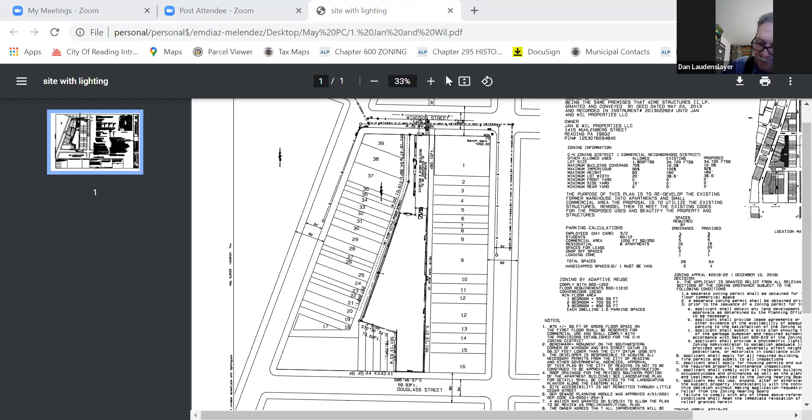Okay, if the commission is so inclined to grant approval of the plan, since there's no record of it, we'll just use the term approval rather than reaffirmation. You could include in the single motion authorizing the chairman to sign the appropriate agreements.

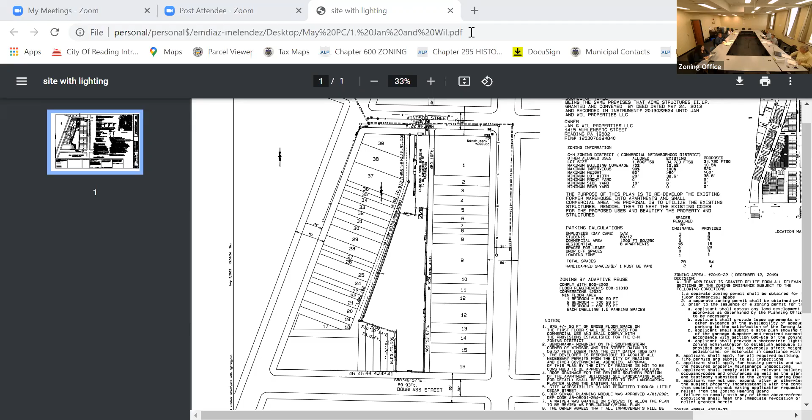Do I hear a motion to give conditional approval to the preliminary final land development plan for Jan and Wil Properties at 810 Windsor Street, with the conditions that the simple improvements agreement will be completed, and that everything on the Hawk Valley Associates review letter dated May 16th, 2022 is met before signature. There's no stormwater agreement required for this project. The improvements agreement can be signed by the chairman when received.

Lee Olsen will make that motion. Thank you, Lee. Do we hear a second? Bob Conklin. Thank you, Bob.

Question on the motion? All those in favor, please say aye. Aye. Aye. Opposed? Very good.

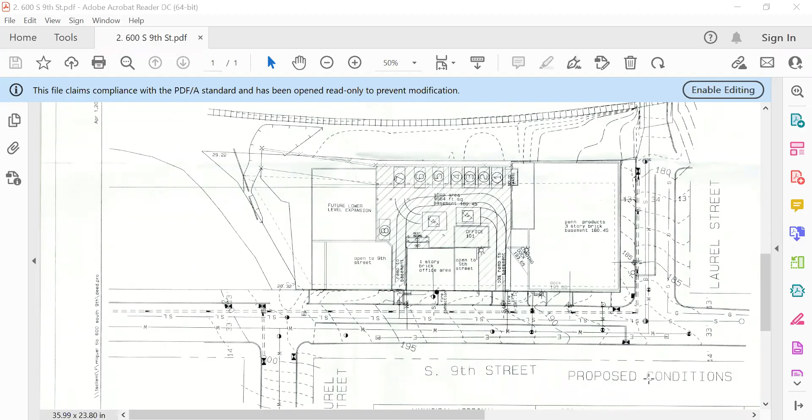I think the idea was that they didn't know exactly what the uses were going to be, so they would prefer to have those cuts remain as is. And we were agreeable with that, with the idea that some of them could use some upgrading. Some of them do appear deteriorated and could use some patching.

We've also asked the fire and rescue department to make sure that the fire hydrants are in appropriate locations considering the use. The improvements on this site would either be none or very minor. I can't think of any, Tim, unless you can, that would require an improvements agreement. I was just gonna ask Tim—no, I don't think that would be of the scale that the planning commission would typically require an improvements agreement.

That was regarding these curb cuts. Yes, any repairs. Okay, yes, there's no stormwater, nothing else from Public Works would require improvements. Everything else in our review letter can be cleared up with notes on the plan. I believe we can do that.

The folks are trying to restore this building, and they have come up with a use for a portion of it, but they have no plans for the other. Now, the auto repairs could maybe expand into some of these other areas, but then we'd have to come back to planning again. And we can put a note to that manner on there.

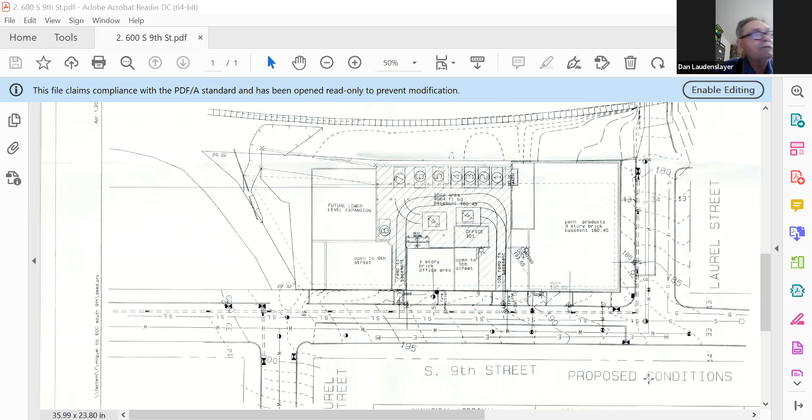And we don't need a sewer module on this one? No. Okay. Right, 2 employees. Okay.

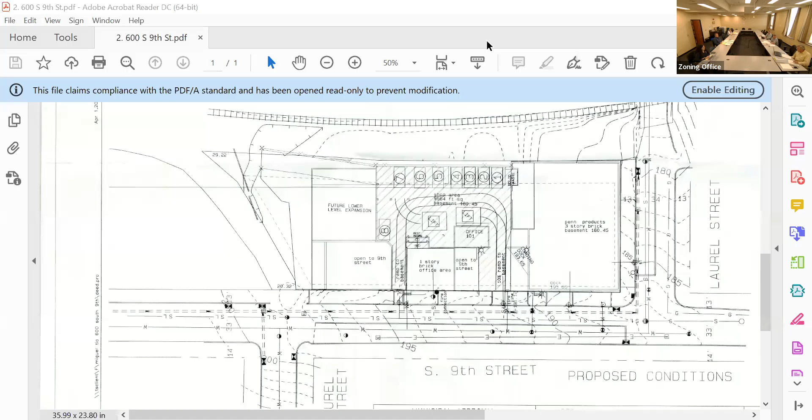Very good. Are there any other comments from staff? Any comments from the commissioners? Hearing none, I'll ask for a...

Motion to give conditional approval to the Auto Repair Center at 600 South 9th Street, with the provision that the items from the Hawk Valley Associates review of May 17th, 2022 are completed to the satisfaction of staff.

Okay, Peter makes the motion. Do I hear a second? Lee Olsen will second. Okay, thank you, Lee.

Discussion on the motion? Okay, hearing none. All those in favor, please say aye. Aye. Aye. Opposed? Okay, and there we go.

Thanks again, Dan. Really appreciate all your hard work. Thank you, I've got two more later on. Okay, we'll touch base.

All right, next on our agenda is the O'Neill Storage Facility, the final land development plan.

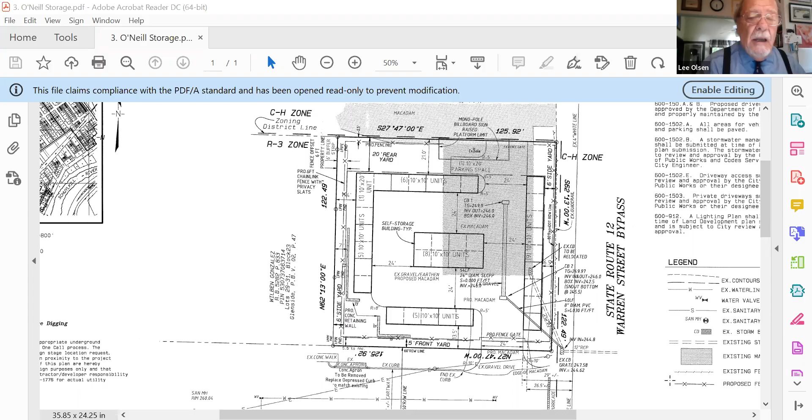With that, first we need to make a motion to accept a waiver for the groundwater recharge calculations as defined in section 505-125 of the stormwater ordinance. Do I hear a motion? So move. Okay, thank you, Nelson. And a second. Lee Olsen will second. Okay, thank you, Lee. Question on the motion? All those in favor, please say aye. Aye. Aye. Opposed? Okay.

Are we ready for conditional approval on this one? I have no doubt that John Hoppert's office is capable of making the revisions. There are no outside permit reviews, so everything else should fall into place. Karen, do you have any objections or other comments?

No, I don't believe so. I had sent an email to you and that was our main concern, and I think we addressed all of those, so I'm good with that. Therefore, we're acceptable to conditional approval.

Emily had stepped out when the issue arose about the fire review. Yeah, I was going to bring that up. There was a question as to whether any comments have been received from the Department of Fire and Rescue, it's comment 6 in my review. You haven't received any? I'm sure I can follow up with fire. Very good. With that, do I hear a motion to grant conditional approval to the O'Neill Storage Land Development Plan

for 1403 Chester Street, with the provisions that the comments of the Hawk Valley Associates review letter of May 19th, 2022 are met to the satisfaction of staff, and that the chairman can endorse the municipal improvements agreement and the stormwater management plan when received. Lee Olsen will make that motion.

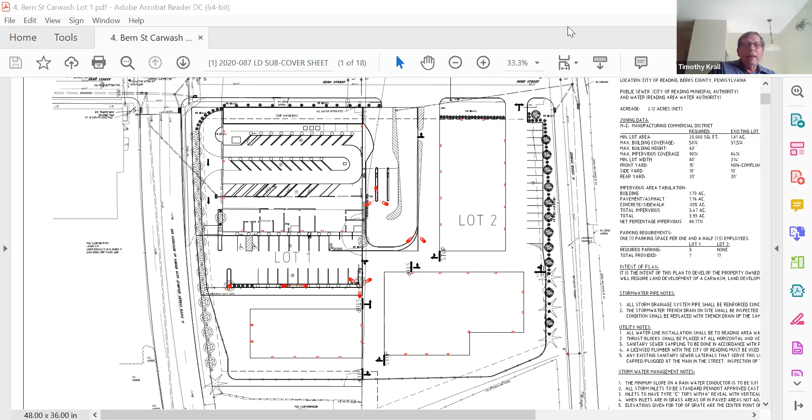Good point. If you wanted to continue that, we would need an ordinance because I'm going to guess there isn't one already. And vice versa, if there is one and we need to repeal it, if you want it repealed, correct. Michelle, could you, when you get a chance, let me know the review of that, if that's in your domain? So I understand where it's located. Yes, thank you.

Greg, did you have a chance to submit for the HOP permit? Not yet. It wasn't that long ago that we really walked everything, and that plan was being worked out as we speak. Okay, but you agree that there probably needs to be one pulled? Yeah, I walked it as well with Mr. Lovell and the team for the project with the applicant, and everybody was agreeable.

Yeah, the HOP and NPDES permit will take time. Very good. Any comments from the commissioners? Hearing none.

Mr. Chairman, can you hear me? Oh hi, Will, there you are. Yeah, go ahead, Will. I was muted, okay.

Thank you, I just have one quick question. It's not as much of a concern as it had been on the plan we just approved, because the access seems to be a lot easier for this site, but has there been any discussion yet on the billboard and any easement for the access of that? I know this is only for the preliminary, but I was just wondering about that.

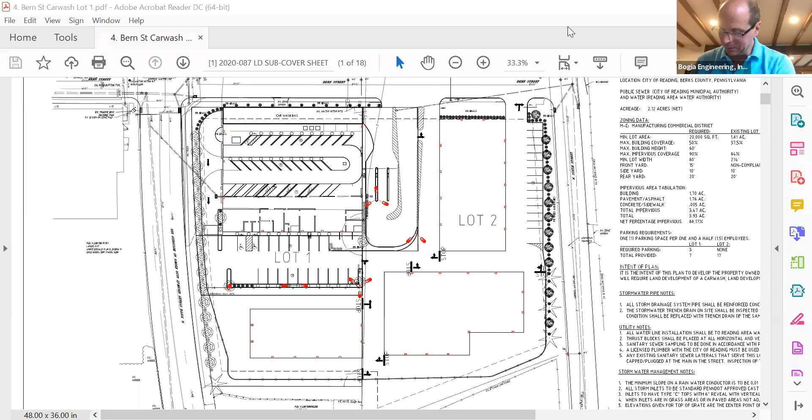Very good, any other comments? Okay, hearing none. Do I hear a motion for conditional approval of the revised preliminary plan for lot 1 of the Bern Street Car Wash at 1725 North Fifth Street, with the condition that the comments of the Hawk Valley Associates review letter of May 20th, 2022 are resolved to the satisfaction of staff. Bob Conklin makes that motion. Okay, thank you, Bob. Second? Lee Olsen seconds. Okay, Peter was first, so we'll take Peter's for this time.

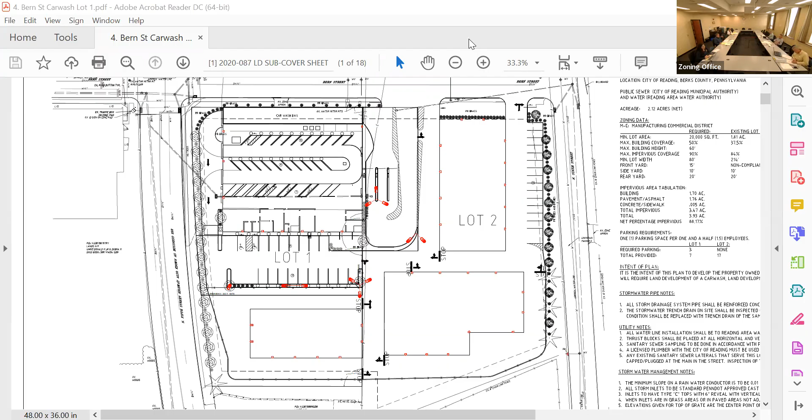Okay, any question on the motion? Hearing none, all those in favor, please say aye. Aye. Aye. Opposed? Very good.

And since we kind of talked about these things in congruence, you had to talk about them both. Yeah, since we talked about these together, may I hear a motion to approve the conditional approval of the revised preliminary plan of lot 2 at 1704 North Sixth Street, with the condition that the items on the review letter by Hawk Valley Associates of May 20th, 2022 are resolved to the satisfaction of staff. I'll offer that motion, Mr. Chairman. Okay, thank you, Will. And a second? Peter? Peter seconds.

Any question on the motion? Hearing none, all those in favor, please say aye. Aye. Aye. Opposed?

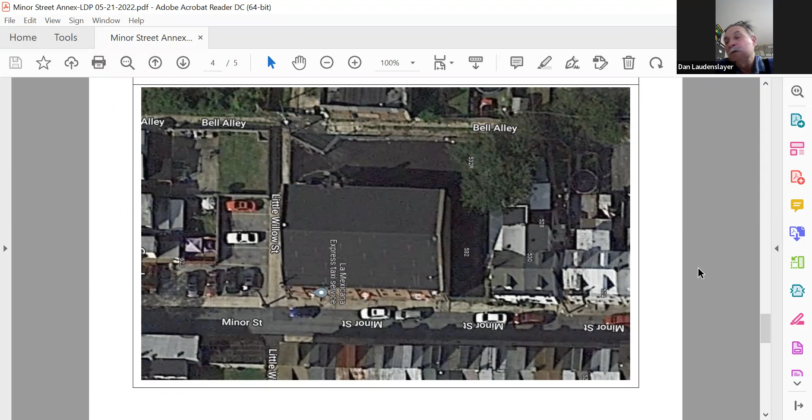Curbs and sidewalks in the front along Minor Street are in fair condition. We had asked Public Works to evaluate those to make sure they did not need to be replaced at this time.

Tim, do you have anything on those? Yeah, I would suggest, Dan, that you do the same thing Greg did and have Chris Lovell go out and look at it, he's best equipped for that. Just from the photos, from what I looked at, I would agree, they look like they're in fair condition.

My question would be, I see the whole front of the building is posted as a loading zone. Is that the owner's intent, or is that a leftover from Dolan, or do you need a loading zone across the front of the building? I'm not sure, Tim, the loading zone was never used in that location. I think that goes back to the horse and buggy days. That location was never used.

I don't even think it has access. If we removed that loading zone, we could free up at least a couple of spaces for the neighborhood. You've got a garage on the north end, and the driveway next to it, but from there on you might have 2 or 3 spaces where the loading zone is.

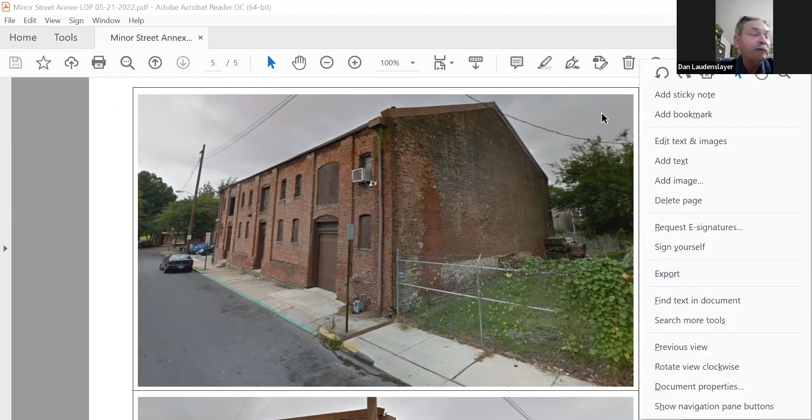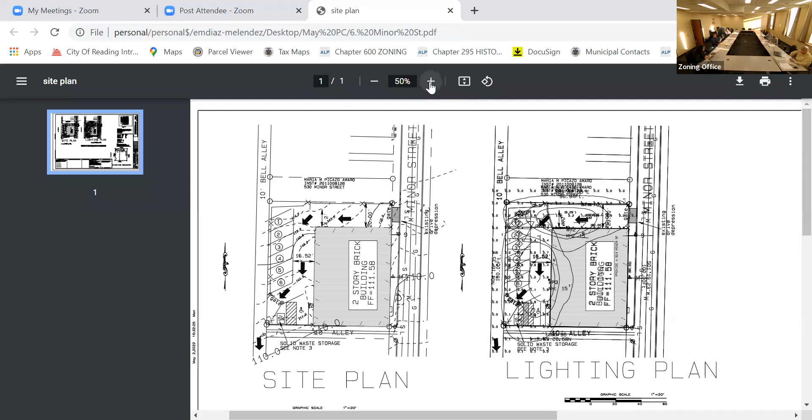Dan, one thing I left off the review was, can a vehicle get in and out of space one? I'll have to check it. Space one, is that down by the gate? Yeah, space one is on the corner - it would be the first space you'd get to if you enter off of Minor Street. Oh, well, you should be able to drive in there and be able to back out of it. Okay, check with your client.

Dan, was that area paved in the past, or was it lawn? In the back of the building, where it was paved, where zoning was commenting about gravel. You know, it's like Jerome is saying that Dolan Construction had that, and they were driving in and out of there - I'm sure Dolan built that driveway. Right, so they were - but it wasn't particularly paved. Well, even if it was gravel, we consider that paved. Is that what you remember, Jerome? Yeah, that was gravel.

So that was probably before 2008, would you say? I don't know, how far back are you going? We'll go back to 1985. Okay, yeah, I know Dolan's been around. Looking at the wearing on that concrete, on that driveway ramp, I agree with it - that looks like driveway ramps I built back in the 70s and early 80s. Yeah, if that has been used as paving, whether asphalt or brick or whatever, if it was used as paving and you went in there and paved it, we've always considered that maintenance and not new impervious. It's always been impervious because you've used it for commercial use here, in this case with trucks and whatnot.

So if you could put some landscaping in there, that'd be wonderful. Well, that's what I did. But look at my landscape - otherwise it would not apply to the stormwater management ordinance here. Okay, but we'll take the green space. I struggled trying to get some kind of stormwater credits on there, and to try to convey that roof water back out to the street, so it's not impacting the rear of their building. Very good.

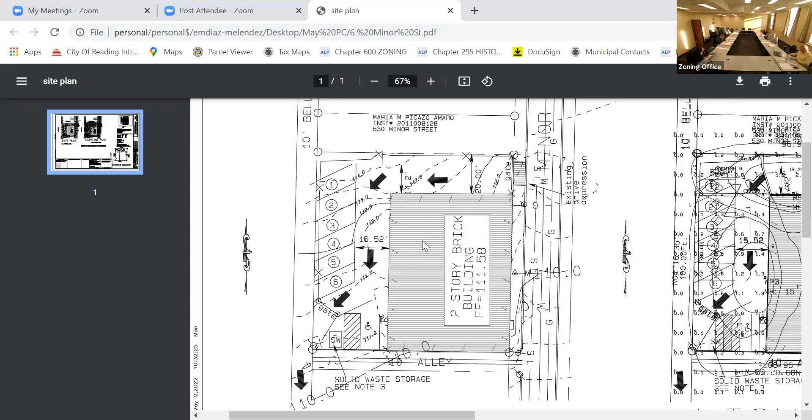Next on our list, we have the Sixth and Spring Parking Facility preliminary final land development plan at 601 North 6th Street.

Those of us who have been here a while may remember that we approved the subdivision of this back in 2017, and the subdivision plan was recorded on June 5th, 2017. I pulled those things up so that Jerome had a little bit of background about this. So I'll turn it over to Jerome.

This plan was reviewed on May 22nd, 2022. This is a preliminary/final land development plan. It is a 23,085 square foot property that is currently a vacant lot. The applicant intends to develop the site with a surface parking area in order to accommodate the existing commercial and residential uses located on the...

Let's call it the, which corner? That is the catty corner, south. Yeah, that would be the southwest corner. Yes, of 6th and Spring.

Plan consists of 2 plan sheets. The site is located within the manufacturing commercial zoning district. The proposed surface parking area and use was permitted as a principal use. As I had mentioned, it is to specifically address a need for parking within the area, not for a new use, but for an existing use. There are 28 off-street parking spaces located within this facility.

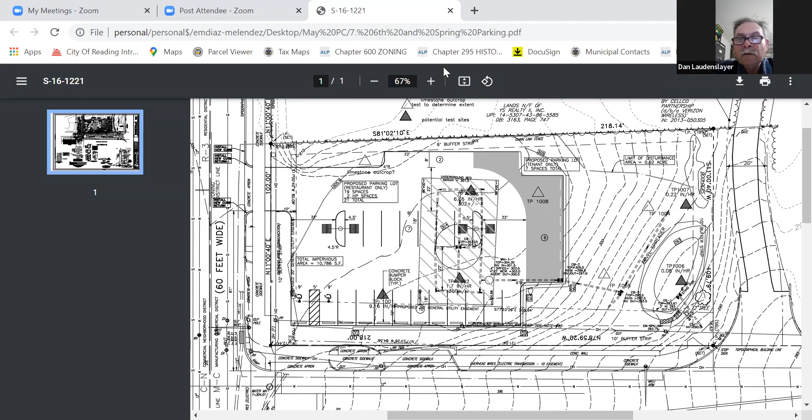Yeah, it occurred to me over the weekend, Dan, that the Spring Street improvement project was coming up because they're finishing the River Road extension that's coming along, and I knew that the Spring Street upgrade would come right after that. So I figured if you knew a little bit more about it, that would put the owner of this property a little more at ease, that some of these things will be actually taken care of for him.

Any other comments from staff? Any comments from the commissioners?

Yeah, this is Will, Mr. Chairman. I couldn't remember how many years ago it was, but we reviewed this last. I'm glad you mentioned it was 2017. And just to clarify, at that time, what we did do was we approved the subdivision from the Norfolk Southern parcel. We did that because the purpose was what the applicant, the owner wanted was to develop this as a parking lot, even though, as far back as I remember, which is even further back, it's always been used as a parking lot. I think it might have been a car dealership at one point, but it's always been occupied. He wanted to improve it as a parking lot to serve the former guardhouse restaurant, which has served as other kinds of restaurants since then, and I think has been vacant since. And like you said, the stormwater was really challenging because of the difficult topography of this site. So it's good that there's a plan now that can address that satisfactorily.

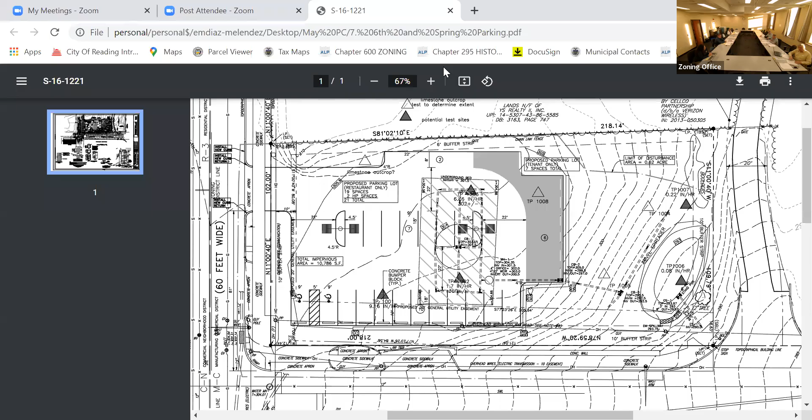Right. Any other comments? Okay. With that, do I hear a motion to table this until we receive the Berks County Planning Commission comments? I'll move to table it until we receive the Berks County Planning Commission comments. Thank you. Will, second? Second. Thank you, Nelson. You're welcome. Question on the motion? All those in favor of the motion, please say aye. Aye. Aye. Aye. Opposed? Very good.

We move this one ahead now, finally, after all these years.

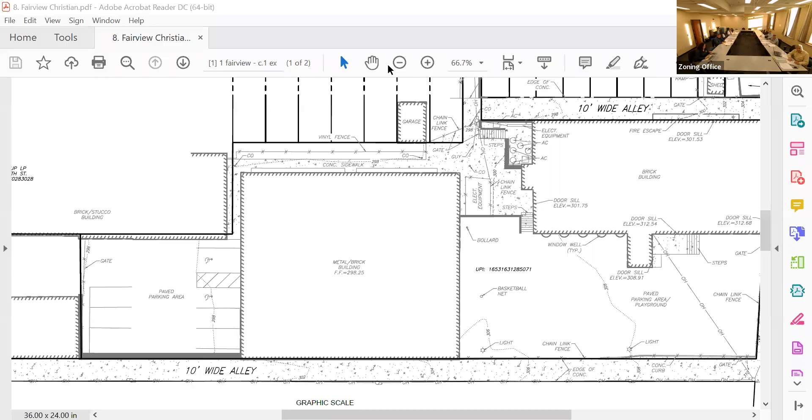Next on our list is the Fairview Annexation and Land Development Plan. This review is dated May 22nd, 2022. This was an older plan that had different variations, and I want to clarify what the current proposal is: it's an annexation involving 4 parcels, not 5.

It's 4 parcels. One parcel is occupied by a residential use and will remain as a residential use. The remaining parcels, the other 4, would be joined in common deed. That's what we've described in our review as phase 1. The lower section of this property has access onto

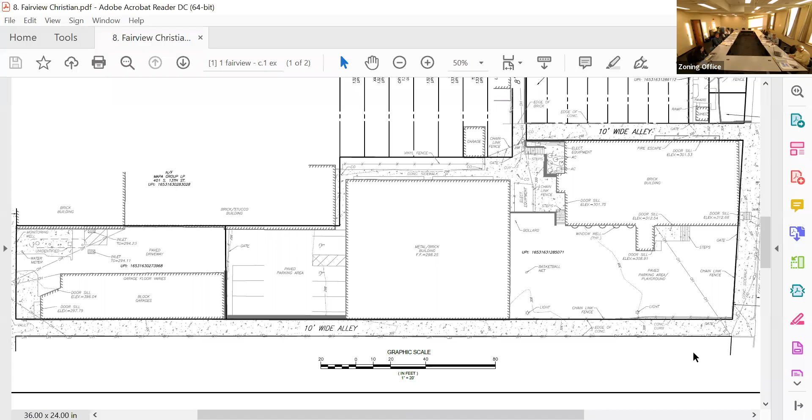South 13th Street, and is being modified slightly as a result of the demolition work done to some outbuildings on the site. So the reconfiguration of the parking will be done. This area is all impervious now, so it's being restriped, and that's shown on the plan with site access. The upper section, which has access onto South 14th Street, was previously attempted to be utilized for parking, as well as modifications to the curb line and driveway line.

That will not be pursued at this time — that would be classified as phase 2. The applicant would still be permitted to park the buses in that location as they did in the past. We've discussed that also with the fire marshal, and he said that's acceptable as long as the drivers remain in the vehicle, not abandon it on site. So as long as that happens, they'll be fine.

So the project is quite simplified from what we reviewed, because we thought other portions were going to be included, such as retaining walls and things like that. They're not going to be included as part of this phase. As you can see on the plan view now, you can see the number of parking spaces, which would help this existing school with parking. Now it's providing more spaces, and the ability to get in and out of those parking areas is enhanced to the point where it's not a maze to get in and out.

Having said all that, the applicant, I believe, is on the line. Hello? Anyone there? Yes, I'm here. Can you hear me? Yeah. Is all that information correct?

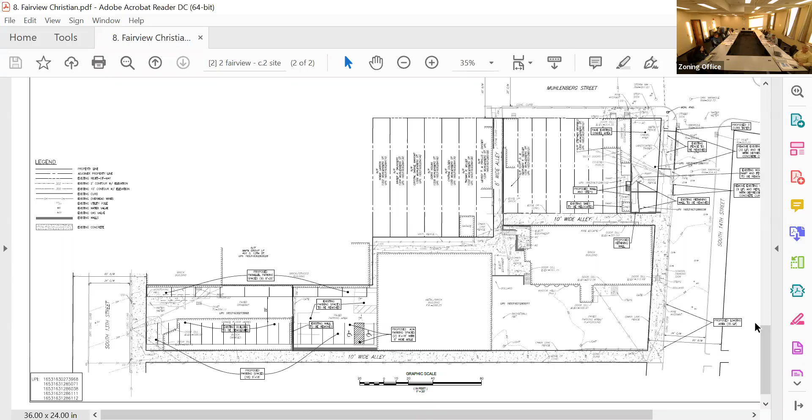Is there any other comments from staff? No agreements, I presume. No agreements.

Do you have anything, Tim? Yeah, the only comment I had is, did we adequately address the parking situation there at the northeast corner up at Muhlenberg Street? They're not pursuing that at all. I'm sorry, I missed that. Okay, they're abandoning that phase of the project. Oh, okay, because it looks like there is potential there for parking. So, okay, and I have no other comments.

Any comments from the commissioners? So which of the 4 are they in the annexation? Ryan, are you still there? Yeah, so which one? It's the lot against 13th Street, backing up to what is our gymnasium, an existing parking lot in the back. So that is 2 lots,

and then combining the corner there on the northeast of 14th and Muhlenberg. There's 2 lots there, which is an empty lot now, combining those 2. It originally had included the first residence there, 1352 Muhlenberg, but that was incorrect — that's not a part of the operation of the school. So it's a total of 4 lots being combined to the school, known as 410 South 14th Street.

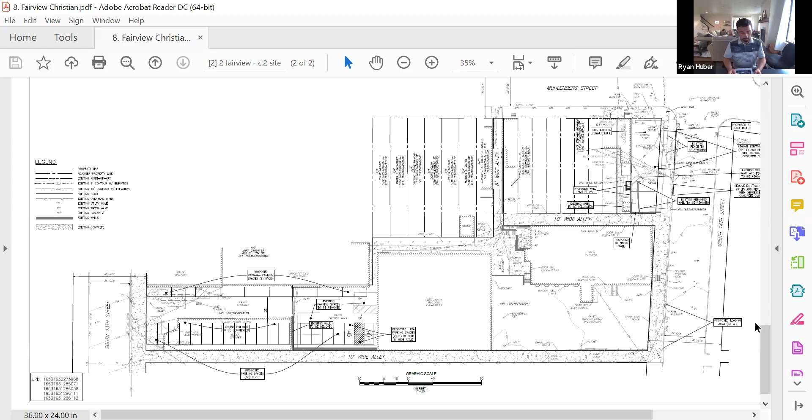1352 Muhlenberg Street, is that the one that contains... maybe I'm wrong. I think 52 is the house, that's the one being removed. 54 is the lot on the corner, which would be B on your review. Yeah, so A is the one being removed.

Okay, now it makes sense to me. Now I'm looking at it correctly. I had it confused. Google put the address, the 1354, behind 1352, next to it.

All right, any other comments from the commissioners? And so with that, hearing none...

Do I hear a motion to conditionally approve the preliminary final plan application for phase 1 of the Fairview Annexation and Land Development Plan, that will combine 1354 Muhlenberg Street, 406 South 14th Street, 410 South 14th Street, and 421 South 13th Street, provided that all comments on the Hawk Valley Associates...

review dated May 22nd, 2022 are resolved to the satisfaction of staff. Lee Olsen will make that motion.

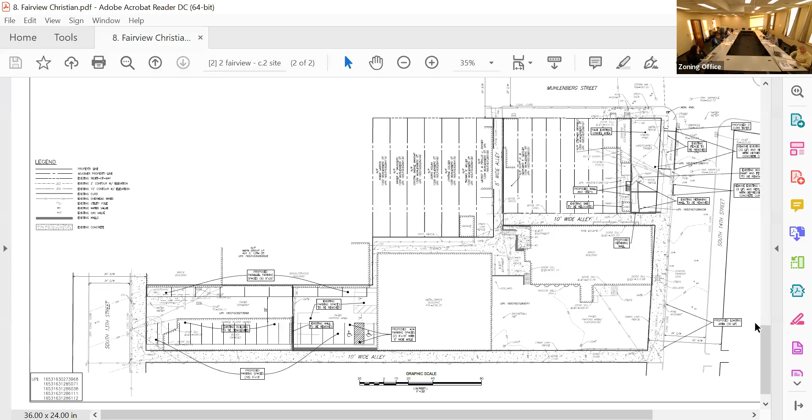Very good. Now we can move this one forward. Thank you very much. Yeah, thank you for your looking at it. Appreciate it.

Good. All right, next on our list is the Schuman Development Group plan for 35 North 6th Street. This is a revised plan of record for the building at 6th and Washington, which used to be the headquarters for Meridian Bank. And I'll turn it over to Jerome.

Great. This review was done on May 23rd, 2022. The address of the property is 35 North 6th Street, and it's either a 5 or 6-story building. I'm not 100% sure. Maybe the applicant can provide us some clarification later.

This plan was approved by special exception for an adaptive reuse project. The site was formerly occupied as a bank/office building. It will now be utilized - I'll let the applicant weigh in later - but according to the zoning hearing board application, it will be utilized as a commercial retail use or food court on floors 1 and 2, and residential apartments on floors 3 through 6. If there is a 6th floor, it wasn't identified.

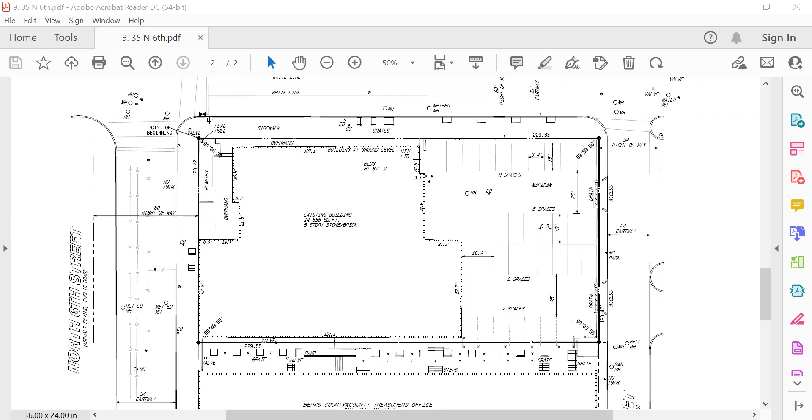I can't see what's on the screen and what's being pointed to. So as long as we're not double counting everything as to what is available, I'm sure it's an adequate amount of parking. So we just get clarification on that. But I'm very appreciative to see this project.

Thank you. If I can make a comment, as Emily with the zoning office, we have implemented a new sort of tracking system, for lack of a better term, for these offsite parking agreements. So we will be reviewing that. If any project is saying that we will be getting offsite parking at this location, we will be requesting a site plan and also just the basic information of the site, just to make sure that those parking spaces aren't being double sold. That was a concern of the zoning hearing board.

So it is going to be now a form that the owner will be filling out to give to whoever they're leasing it to, and providing us that information. That way we can better track it. So we will be reviewing those just to make sure that all of the uses using that parking lot do have the adequate parking. Thank you.

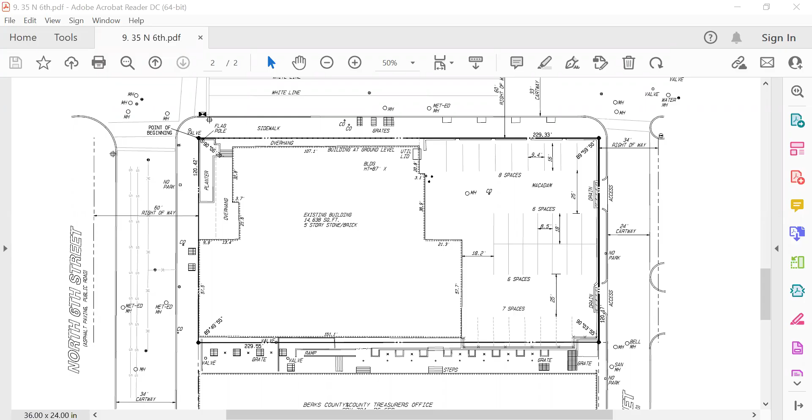Well, I appreciate your comments on saving the building, I agree with those. I want to point out that I did not mention the parking available for the medical arts building because that's a separate project. So the lots at the Corbett building, the interior garage, and the 62 car parking lot next to that are for that project. I didn't even mention them in the listing here.

And then finally, I wanted to comment, there was a comment earlier regarding they weren't sure whether it was a 5-story or 6-story building. It really depends on what code you're looking at. There are 6 floors, but one of them is a mezzanine.

Okay, just like the Berkshire. Yeah, that's like the Berkshire building, we had the same. So you're counting floors 1 and 2 as including the mezzanine, and then the floors above it would be the residential. Is that correct? So we have a first floor, a mezzanine, a second floor also of offices, and then floors 3, 4, and 5 are all residential. Okay, got it.

How many residential units are we talking? 39. And the second floor, which is the biggest floor in the building, is occupied by Visions Federal Credit Union's new Eastern Pennsylvania Operations Center. The mezzanine is fully occupied by former Berkshire Building tenants, primarily Mid-Penn Legal and the Justice Cause.

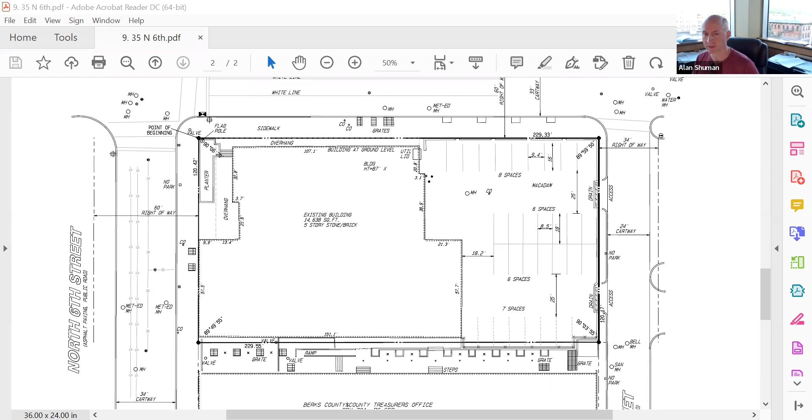That's good to hear. I was wondering where the tenants from the Berkshire building were moving to. Yeah, we helped a few of them out. Yeah, great.

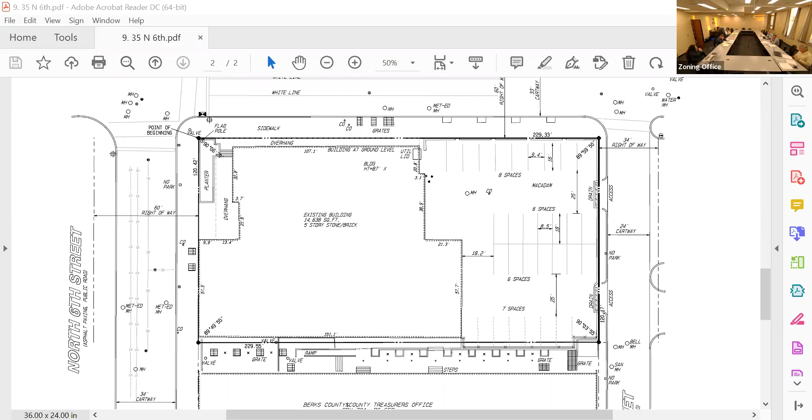Any other comments from the commissioners? Okay, hearing none. Since we did not receive comments from Berks County Planning Commission yet, we will have to table this. So do I hear a motion to table?

Mr. Chairman, why does it need to be tabled? We do not have comments from the Berks County Planning Commission. Is that required? It's a municipal planning code requirement.

I do have a letter from the planning commission, if you'd like me to read a paragraph of it, stating that they will not review this, but they did not feel it was necessary to review it.

Mr. Shuman, this is Emily. If you can just forward that to me, that way we have it. If you do it right now, I could probably pull it up. Give me a minute to go scan it and send it over to you. What's that dated? It is dated March 7th.